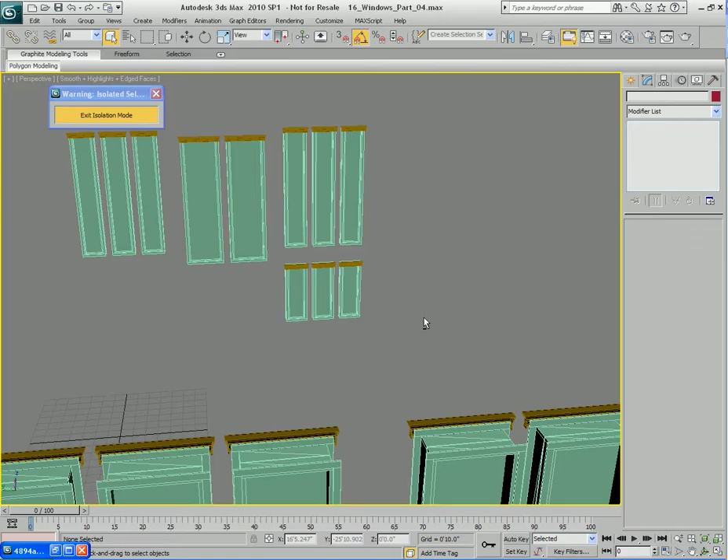Okay, you can see that they're very organic. It's not like creating a window valance or even the shades. These things have very free-form flow to them, so to speak. They're very organic. They're fabric, so it's a whole different ball game as to how you model this kind of stuff. Okay, but I'm going to show you some techniques and some tools with 3ds Max that we can take advantage of to make a job that would normally be difficult as easy and as quick as possible.

Okay, so this is what we have to create, these window drapes. So based on the reference image, we've got something good to go on here. So let's go ahead and get started. So I'm going to start off with this center window here, like I've done before in the past. Okay, I'm going to go ahead and I'm going to create myself a box. Just bring that up like that. Okay, kind of place it in front of the window right there.

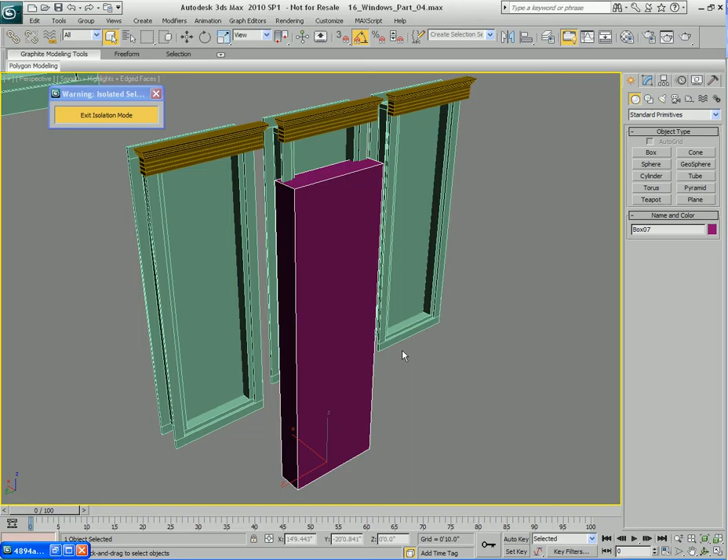Something like that. And you know what I'll do? Just to make sure it's aligned properly, I'm going to align it to that valance right there. I'm going to go center and center. I'm not going to align it in the Z, just X and Y is fine. And I'll hit OK. Then I'm going to take this box and convert it to an editable poly.

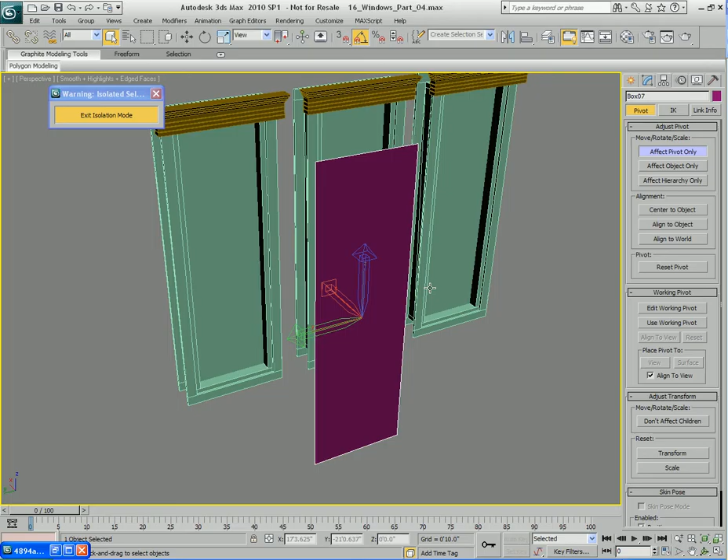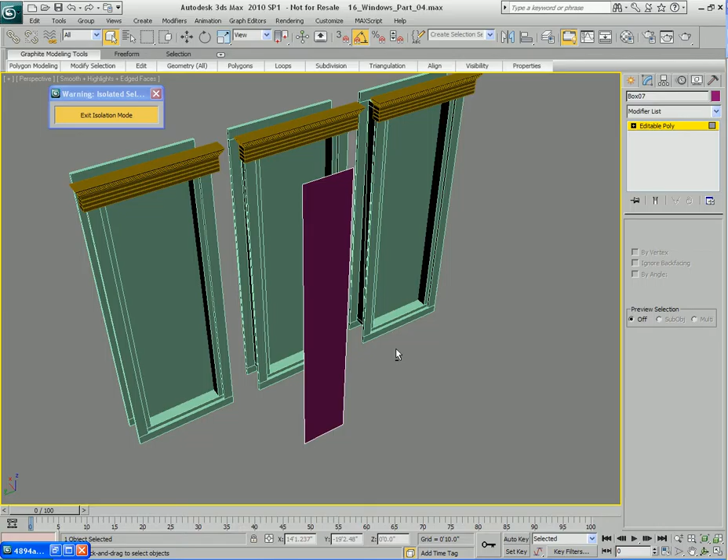I'm going to select the front poly and hit Control and I to invert the selection and select all the other polygons. And I'm going to delete those, so we end up with just this object here, which is going to essentially become our window panel. Okay. I'm also going to take the center pivot point, and I'm going to place it in the middle of the object here, like so. And that's pretty good.

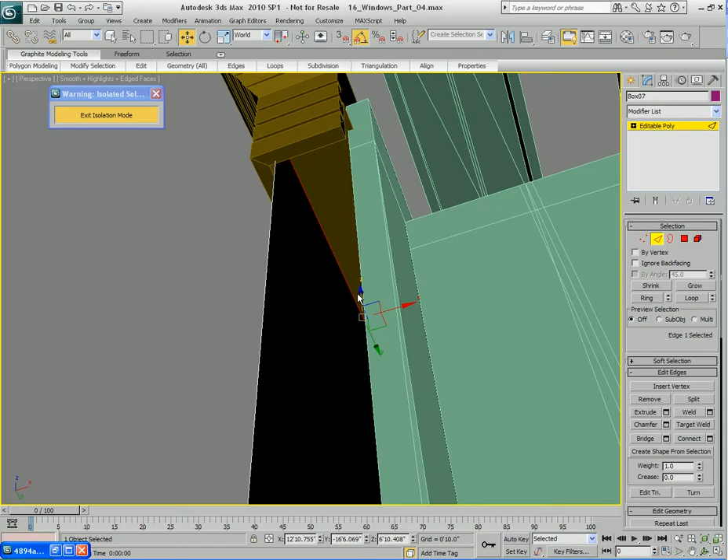Okay, so this is the way that I'm going to do this. I'm going to take the top and bottom edges. I'm going to connect them one time down the middle. I'm going to take the left half here and delete it. And I'm going to create basically one half panel over here. Okay, I'm going to take this edge and move it in just a little bit like so.

And I'm going to take the top edge here, and I'm going to move that up, so it's going to go underneath on the inside hollow part of the valance. Remember that? That was the whole point of creating that, by the way, in case you're wondering.

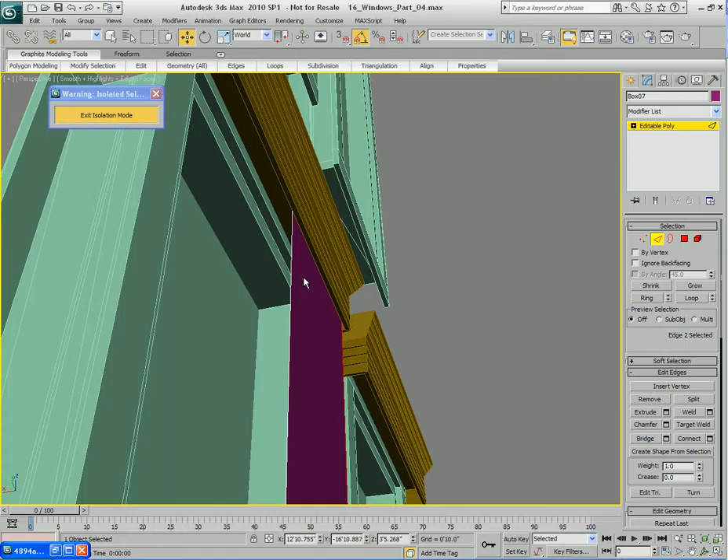Okay. You can see right here it's kind of penetrating through. So I'm just going to take that edge right there and just move it just a little bit right there. So we end up with a little tiny gap right there like that. Okay. So the curtain goes inside the actual valance, as you can see. Alright. Okay. So I've got that done.

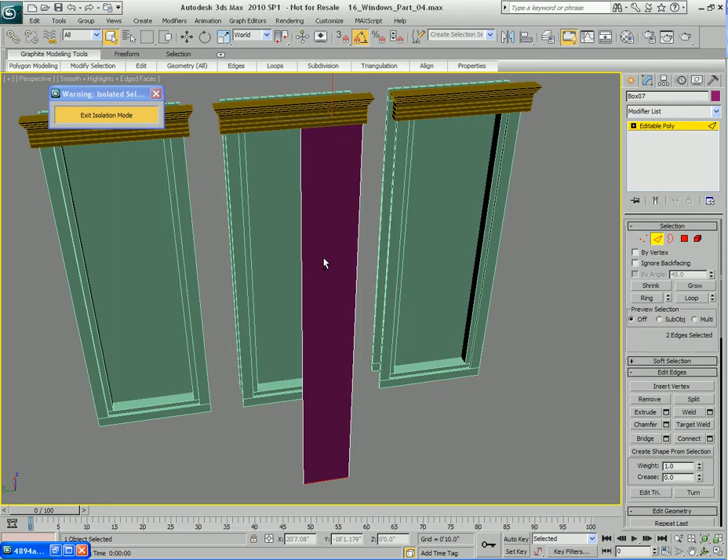I need to take this edge at the end and move it high, just a little bit off the ground. I can't see ground right now, but trust me, the floor of our house is about right there, so I just moved it up. And now what I'm going to do is I'm just going to take the top and bottom edges here, and now that I have a curtain panel, what I can do is actually pretty simple.

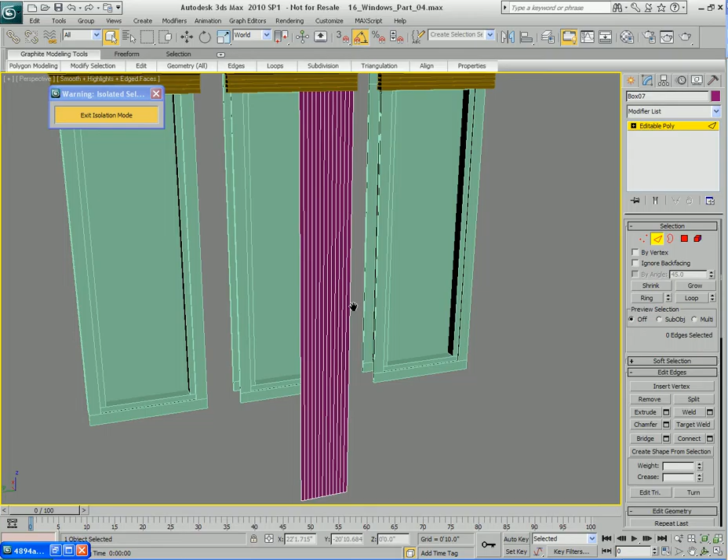I can go ahead and make a connection here, and I'm going to connect this a lot of times, okay? I'm going to do something like maybe, I don't know if I should do maybe 12, maybe I should do more. I'm going to go with 12, okay, and hit OK. Okay, now that I've got 12 connections there, those 12 connections are going to be pleats. If you're familiar with curtains or you're an interior designer, you know what pleats on a curtain are.

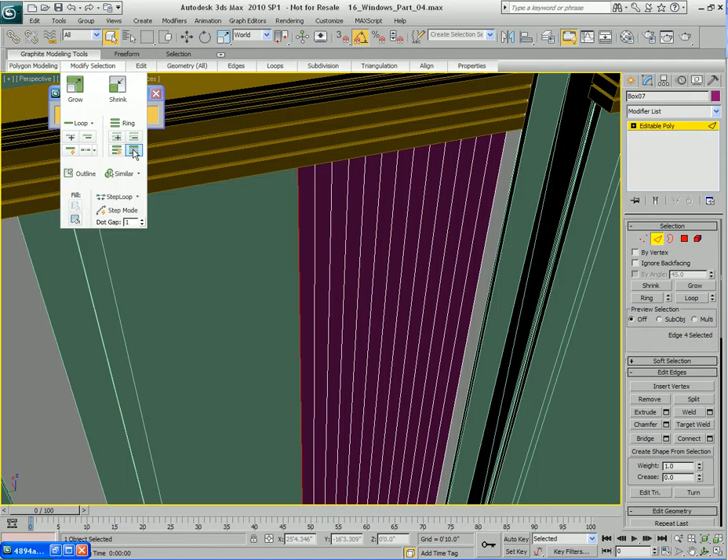If you don't, you're about to find out. Okay, so what I'm going to do now is I'm going to take this edge here. I'm going to go to my graphite modeling tools, and this is why the graphite modeling tools are so magnificent. I can go over here and use my dot loop tool, and when I use that,

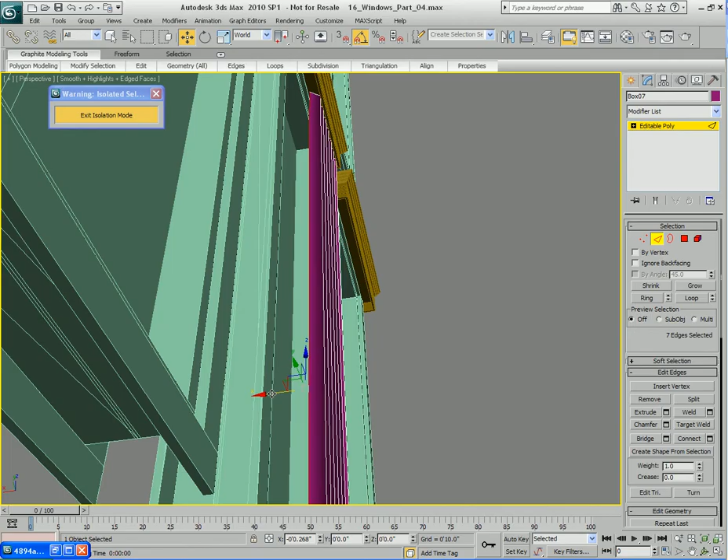I'm going to go down here, use my ring tools. I'm going to use my dot ring tool, and when I select my dot ring tool, I can select every other edge of this object, as you can see, which is fantastic. Because now I can take all these edges and I can just move them back like this. Now I'm going to keep an eye on the top here, make sure it doesn't penetrate through to something like this. And I end up with this kind of a shape.

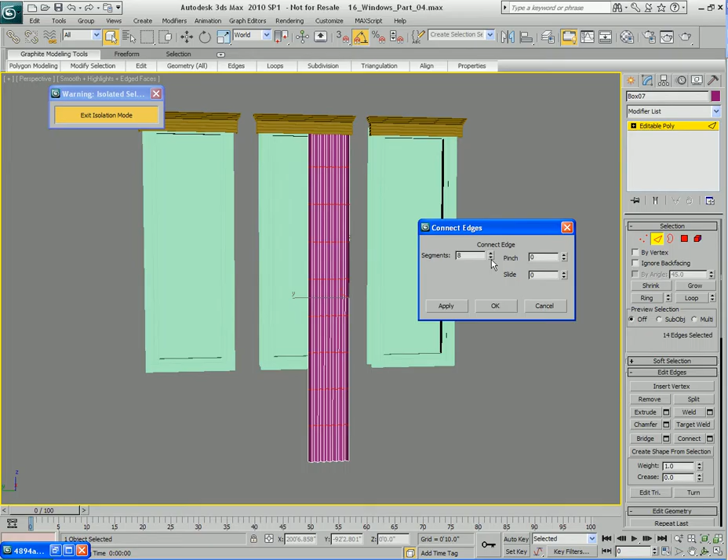See these pleats right there? Just like the curtain in real life. That's going to give me my initial shape to go ahead and get started with this. But I'm going to need more geometry for this because this just isn't enough. So I'm going to select all of these edges here. I'm going to use the connect tool. And I'm going to connect that maybe about 8 times, will probably work out pretty good. And I'm going to hit OK.

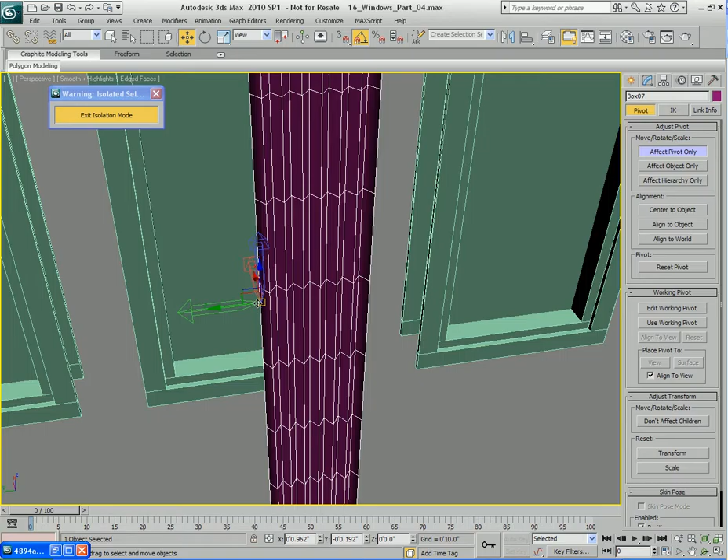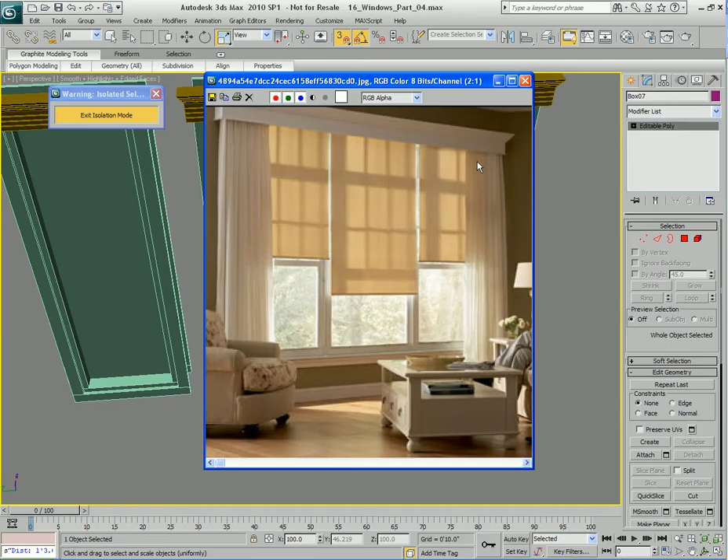Right. Now that I've created my base geometry, I can actually start to work with this and make it look more like a curtain, because right now it just doesn't look too much like a curtain. So what I need to do is I need to take my pivot point. I'm going to take this pivot point, I'm going to snap it to the side over here. Okay, doesn't really matter where exactly. And I'm just going to scale this in like this. And you can see it scales kind of like an accordion, so you can stretch it out, or you can bring it in like this.

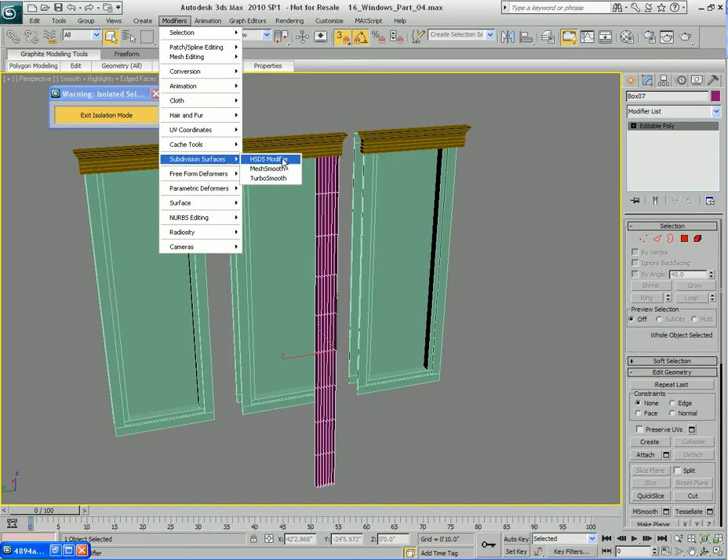And that's how the image is. You can see that the drapes, you can probably pull them together into the middle here to basically cover up the window, or you can just pull them off to the side like this, and you end up with this sort of pleated shape here, okay, almost like an accordion. Alright, so now that I scaled them in and put them together like this, what I can do is I can turn on NURMS toggle and get a smoother effect.

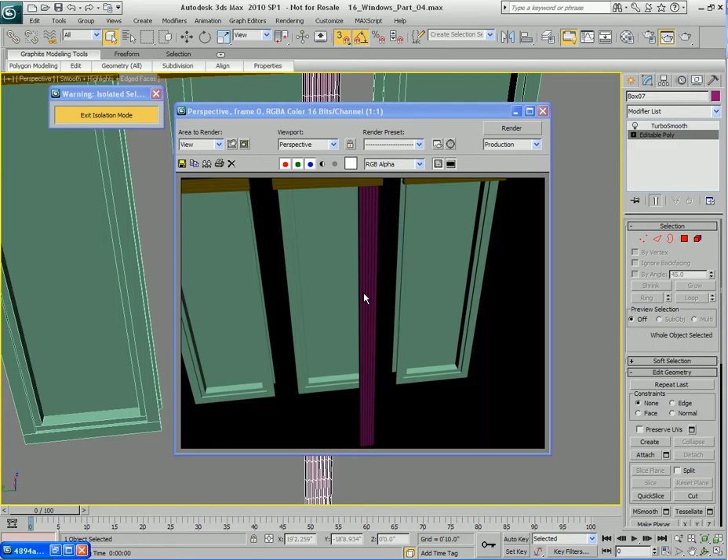But if you remember, when we first started this tutorial, the first set of videos, I talked about this, very important. NURMS toggle, when you're working with a very high-res mesh, is very slow and not optimized. It's not performance friendly. So what we should do instead is go to the modifiers, grab ourselves a subdivision surface modifier, grab the Turbo Smooth, which has better performance benefits to it.

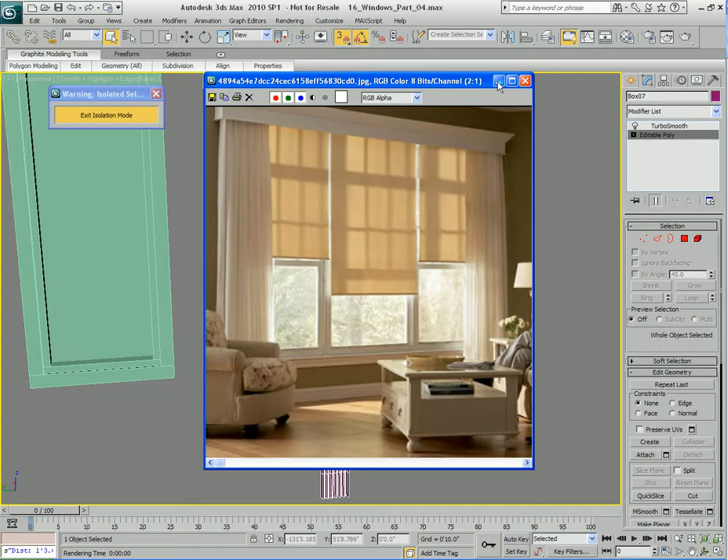Okay? And what I'm going to do is go back to my Edit Poly over here in the modifier stack, and I'm going to turn on the Show End Result button down here so that I can see the Turbo Smooth on top of the object, so we end up with something like this. Okay? Now if I render this out, it looks kind of like a curtain, but something's wrong. It looks too uniform. It looks too perfect. Okay? Curtains like that just don't exist in real life.

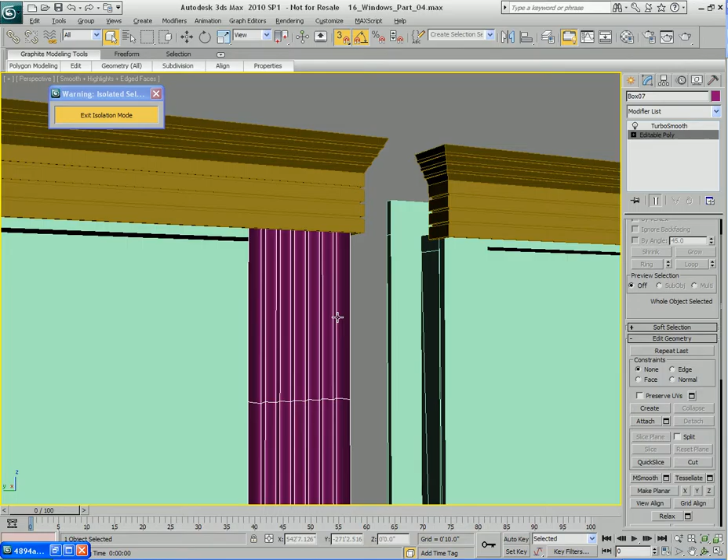If we look at these drapes, you could see that they're kind of fluffed out. They're kind of randomized. They're very natural looking. They don't just go straight down perfectly, almost like if these things were made out of steel or some kind of metal. You can see they're very organic, very free-flowing, so to speak. And we need to imitate that here in 3ds Max.

So the way that I'm going to do that is actually pretty interesting. Let me go back to my Turbo Smooth. I'm going to give this thing 2 iterations to make it smoother. And I can turn on Isoline Display here to make it easier to see.

Okay? So if I render this out, it's very smooth and very nice, very silky smooth. But I want this to look a little bit more randomized, a little more like a real curtain. So the way I can do that is actually pretty easy. Let me show you how I can do that very easily.

With the Edit Poly object over here in the modifier stack selected, I can go over here to my Graphite Modeling Tools, go to the Freeform category, and I can go to Paint Deform. And Paint Deform is really cool because we have all these different brushes that we can use to literally paint deformation and different types of surface characteristics to our objects.

So for example, we can use the Push and Pull, which is going to do exactly as the name suggests. It'll push components, push vertices, and pull them apart. We can relax and soften. We can smudge, flatten. We can also exaggerate features. We can also go ahead and add noise and use the Pinch and Spread. The Pinch and Spread is just an awesome, awesome brush. They're all really good, but depending on the situation, you might want to use one or the other.

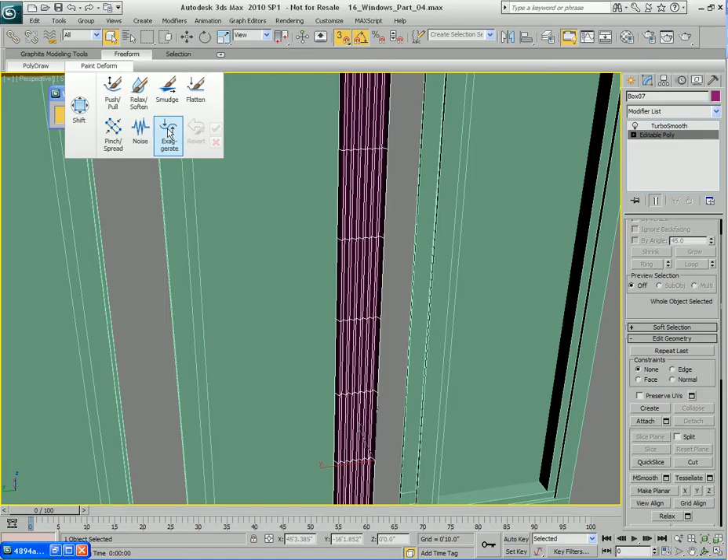So let's use the Exaggerate very quickly here, just to illustrate some points. Okay. So the way we use this is we select a tool, and each tool has a few different shortcuts to it. For example, with the Exaggerate tool, we can select it. And you probably can't see this in the video, but while you're working with Max on your workstation, you probably notice that you get this very large tooltip that pops up on the bottom and actually shows you an image of how this thing works. And it'll also show you the keyboard shortcuts while you're using the tool.

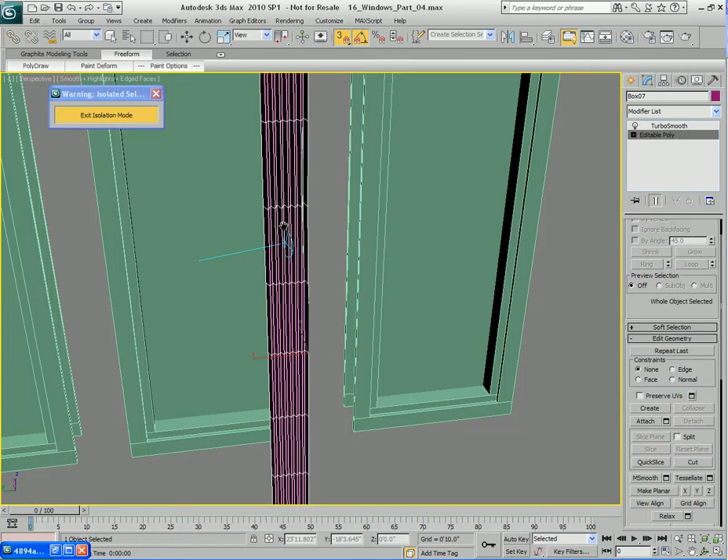So for example, with this one, we can hold down Shift to relax the mesh. We can hold down Control while we paint on a mesh to revert it. We can also hold down Control and Shift to resize the brush, and Shift and Alt changes the brush strength. Okay, so let me go ahead and use the Exaggerate brush over here. You can see the size of the brush is kind of big, so I'll hold down Control and Shift and then click and drag to make it smaller.

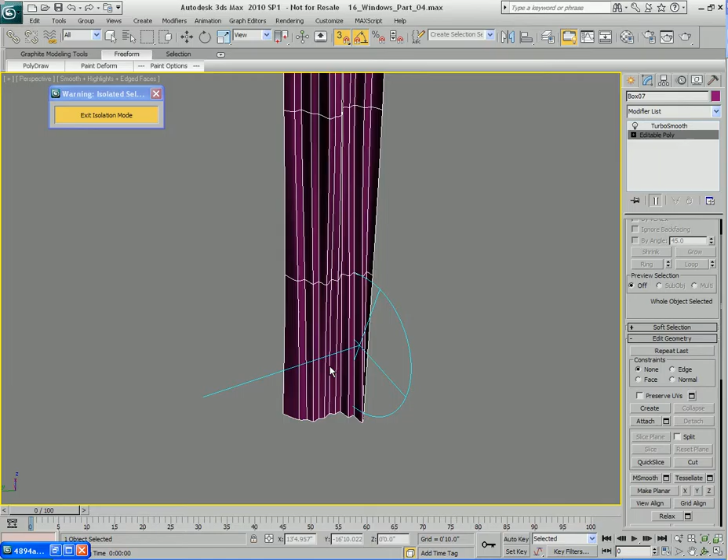You can see as I come in here, I can exaggerate some of these features just by painting on it. But I don't want to use that one. What I want to use is the Noise brush. Noise brush is really cool. We can come in here and just paint in random noise for the curtain. So you can see as I come in here, things look a little bit different.

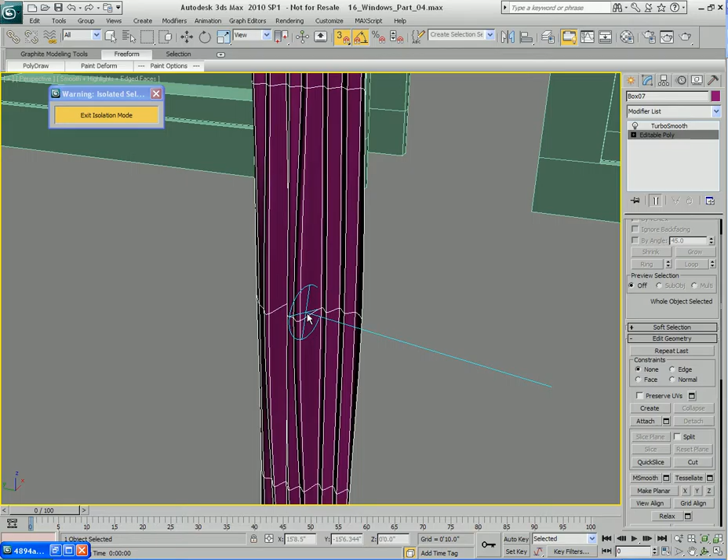If I use Alt, it has the opposite effect. So if I use Alt, you notice it kind of pushes stuff in. If I don't use Alt, it pushes it out. So we start to end up with these sort of random type effects. And you can see here when I start to render this out with the Turbo Smooth on, you can already see that it looks much more natural, much more realistic looking than what we had before.

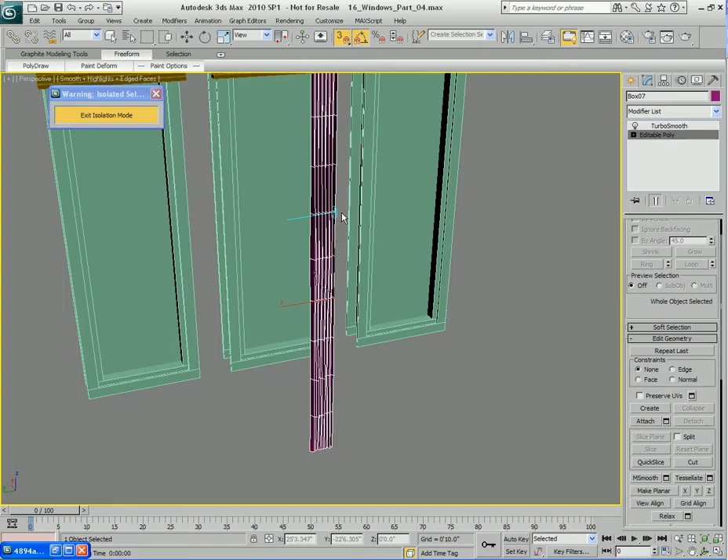So you can push this in, we can pull it, we can just move it around and end up with just these really, really cool effects. We can reduce the size of the brush so we can affect just a specific area. And really it's just a matter of coming in here and playing with this for a while. You could literally sit here and spend a good hour, if not more, painting this to your heart's content and just having some fun with it.

Okay? Alright, so now that you've got that idea, I'm going to end this video here. In the next video, we're going to work on making this look very natural, random looking, and making it look more like a realistic curtain as opposed to a geometric object created in 3ds Max.